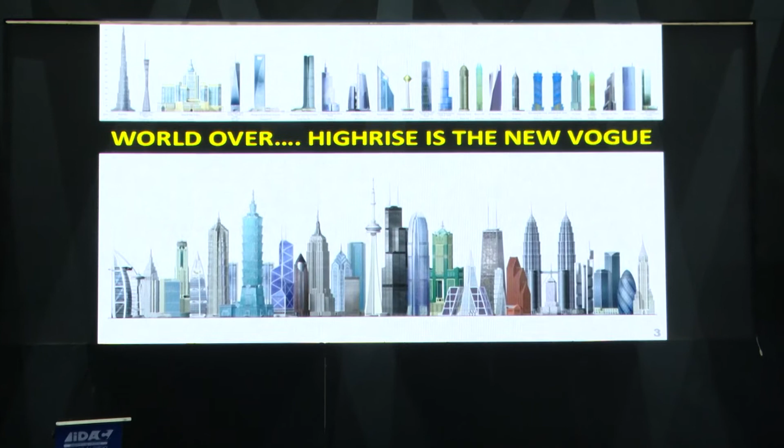Most of the time, in the extreme, you see the good high-rise buildings are done by architects and engineers together. It was an architect and engineer who did the first high-rise building, an icon in the USA. It's an architect and engineer who brought you the concept of structural designing for the last century, for the next 100 years. So the architect has to play the role of an engineer and understand engineering, and the engineer should also understand architecture. In this context, I want to speak to you about that. Today, of course, I will be talking about high-rise buildings in India particularly.

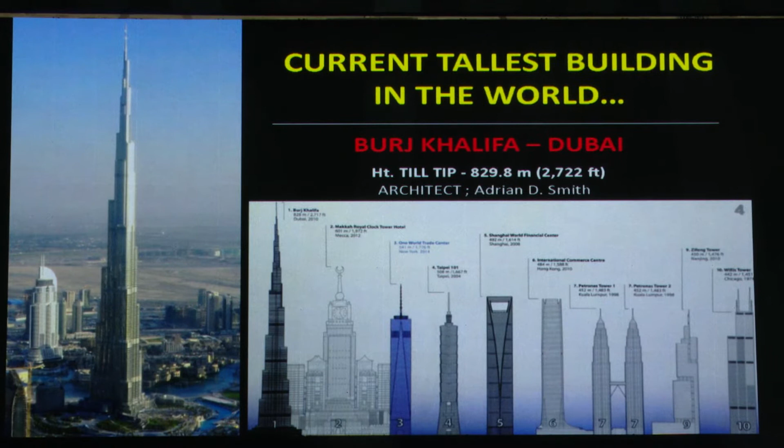The current tallest building, as everyone knows, is the Burj Khalifa, and the next one coming is the Kingdom Tower. It will be about 1,000 meters. Really, next year, possibly.

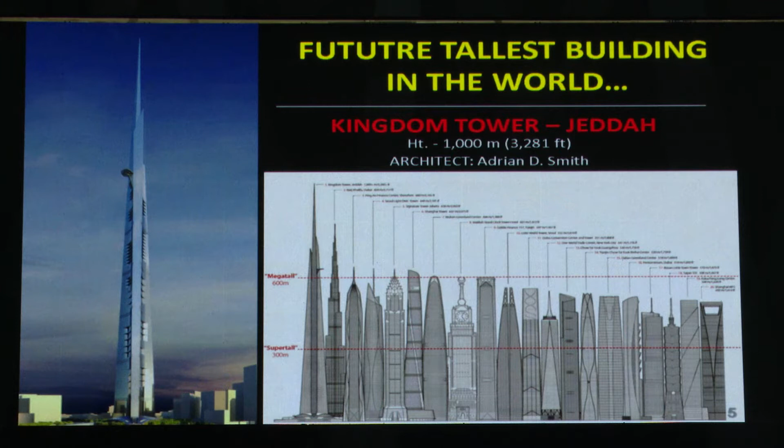It was 1950, 70 years back, when architect Frank Lloyd Wright had devised a 1 mile building, 1609 meters high. Yet after 70 years, the building when it's ready will be 1 kilometer, 1,000 meters, not 1 mile. 1 mile is yet to be reached, that is obvious. Somebody will do it.

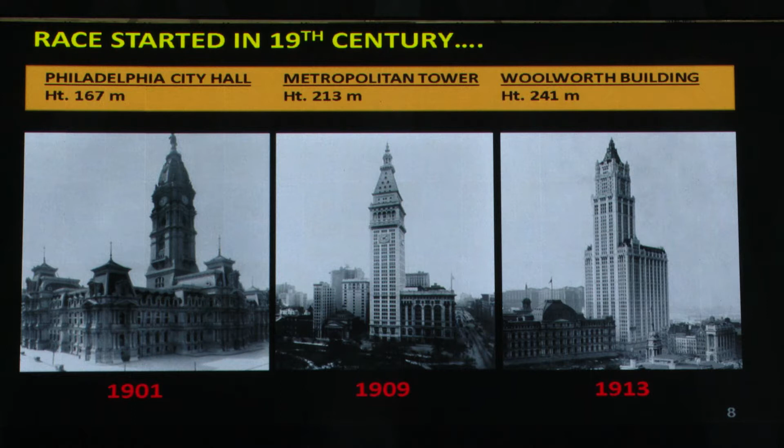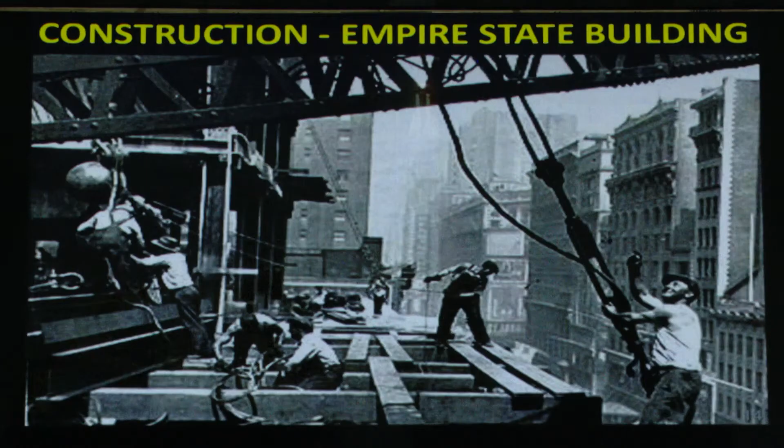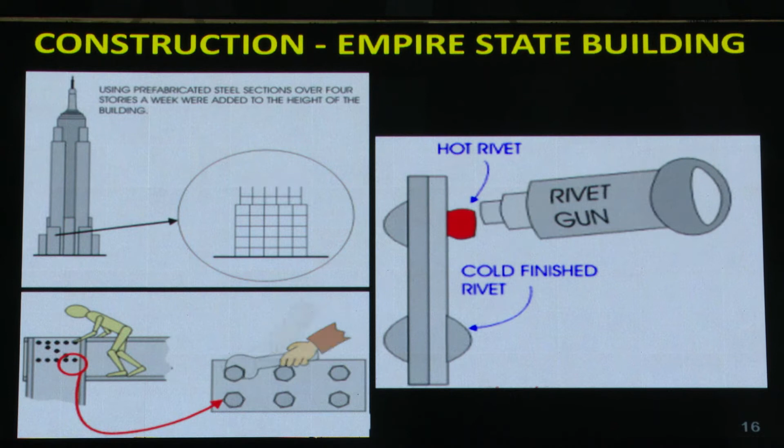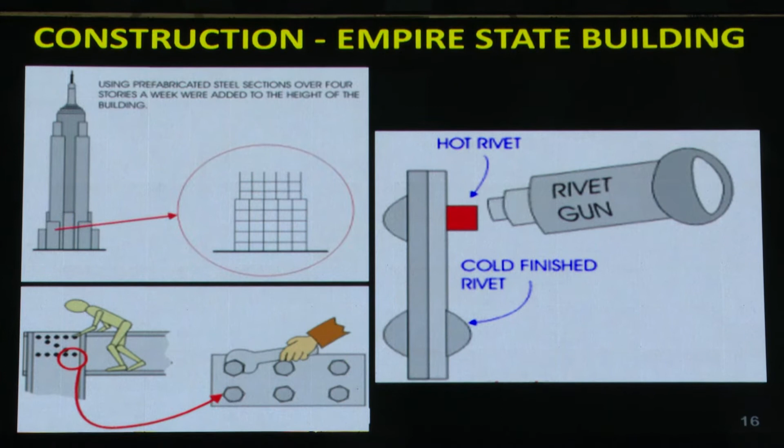What kind of pre-engineering had been done? I'm talking 90 years back, and the building is still standing there.

Look at the boy putting a spire on the building, the Chrysler Building is next to that. Having made this iconic building, do you remember who the architect was, or the structural engineer? What difference does it make? Who designed the building - did Prem Nath design it, did Anna design it, or who designed the building? So never mind, you'll be forgotten one day. Be happy and do a good job for the sake of your knowledge. An iconic building, less than 100 years old, and nobody knows about the architect and engineer. The architect was lost, and the engineer was forgotten too.

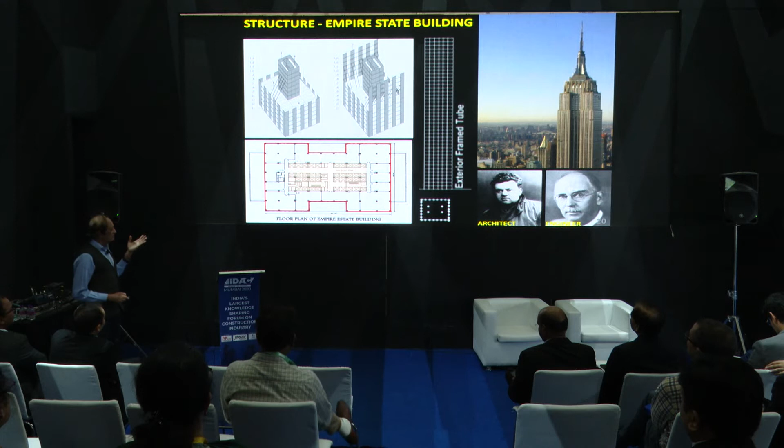And what did the engineer think about that? You didn't have computers, you didn't have a system, you didn't have E-tabs, B-tabs, whatever it is. You didn't even have a calculator - the slide rule was used over there. How must they have designed the building? Think of that.

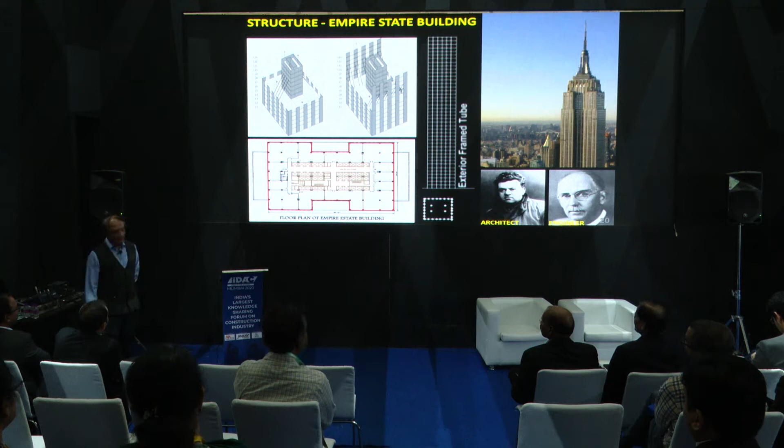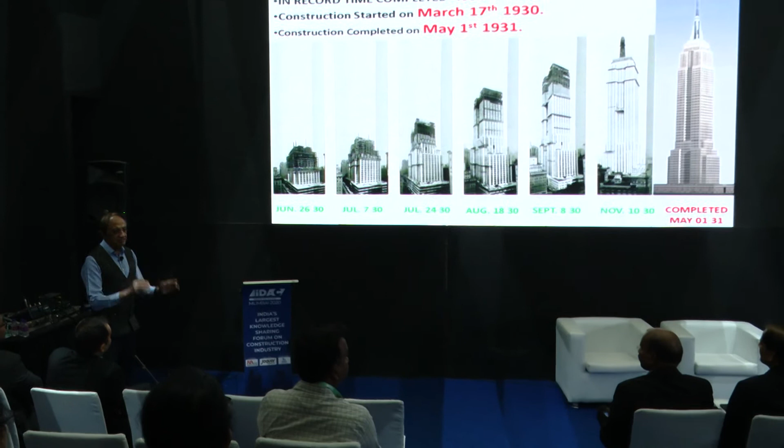The entire structural designing was done while excavation was being done - the plan was being developed at that time. How much time do you take today? You go to engineers, do analysis, do this thing, do that thing - it takes 6 months, 3 months. In 3 months time they would come out of the 10th floor. 104 foundations, 20 meters down, 4 floors, and they had come out of it.

What is our old mystery? Our old people were smart enough - they had one kind of thought, the job is done. They could think fast; today it takes so much time. Implementation takes time, but the design and building was about 12 months time. Can anybody beat that today?

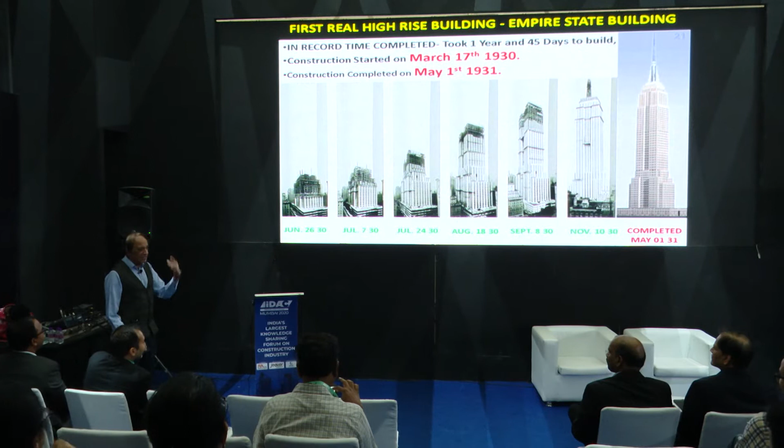We hear China has been doing this - they take about 6 months time for pre-engineering and then come and assemble in 2 months time. That's not a great thing compared to this.

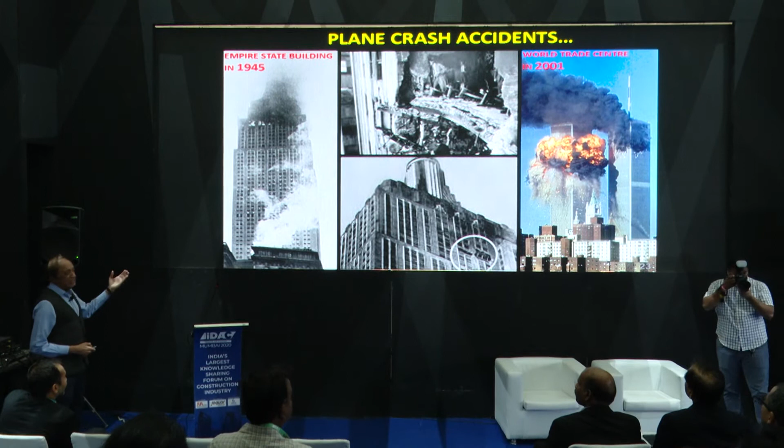This building has been recently renovated, and this building is a test of time. It has gone through earthquakes, windstorms, and a plane crash also. The twin towers fell down, but this building didn't fall - there was a similar kind of accident, a crash, a plane crashed into it, but it survived. A lot of stiffness was built into it.

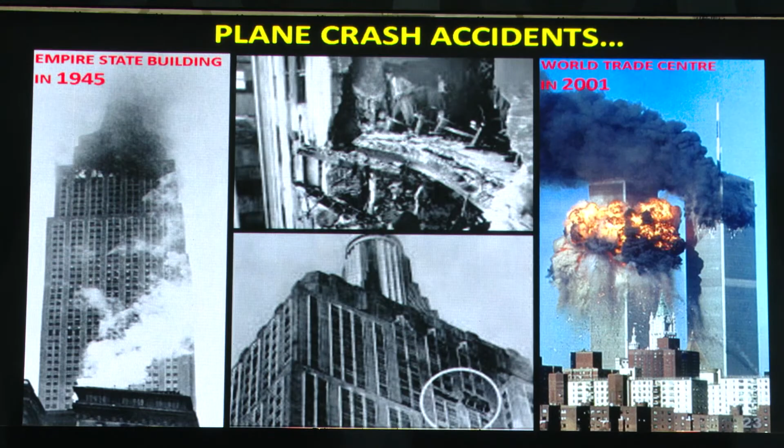The structural system - what you call it - is a core with a tube around it. That's why the building was designed to give stiffness to it. This building has now been renovated and carries a gold rating green building certification - the first time such a building is done after 100 years.

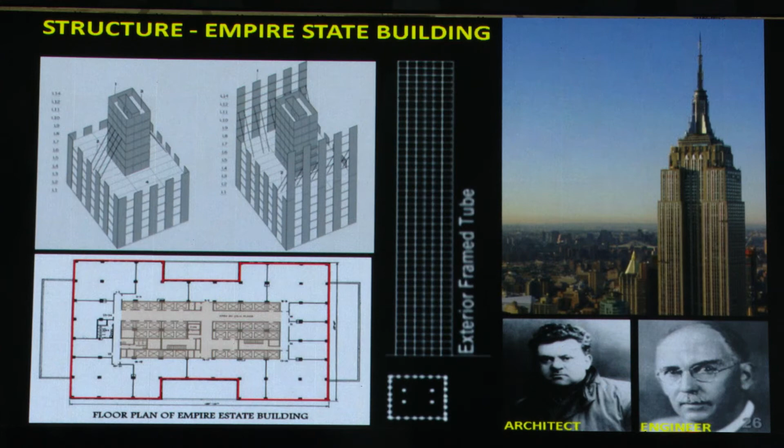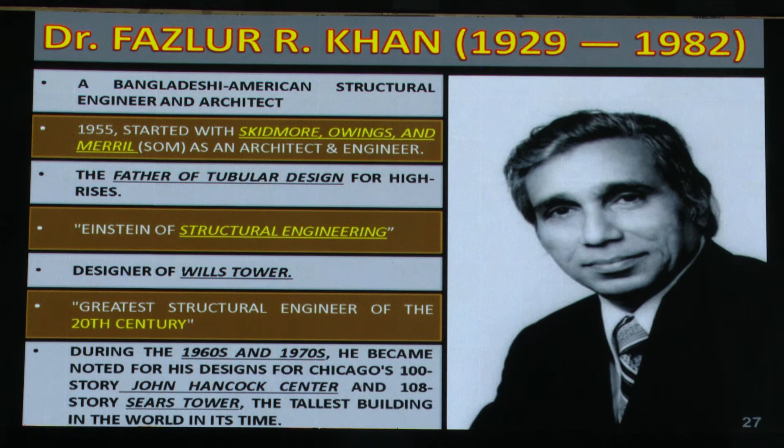The structural system was basically an exterior framed tube, done by them about 100 years back. And after that, you know the guy, Dr. Fazlur Rahman Khan? He's the Einstein of structural engineering. He gave the concept of structural engineering - various working schemes, various design concepts. He built magnificent buildings and gave concepts about different types of structures at different heights. These are being followed by engineers worldwide till now.

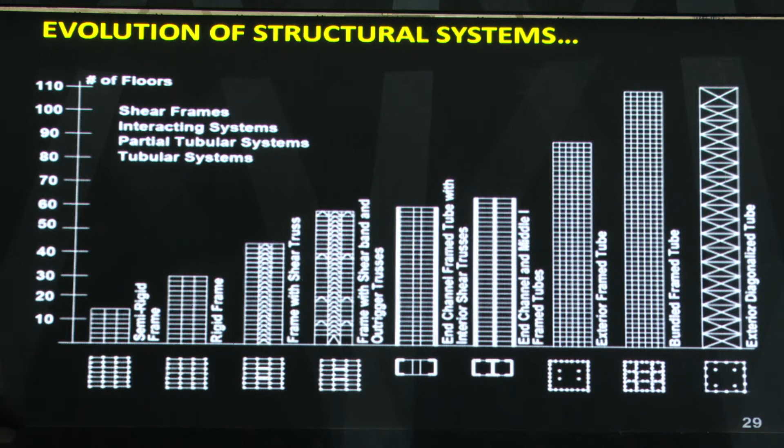What do you call that? You call this double tube. You have a bundled tube. You call it tube in tube, and different things. Even Burj Khalifa and our building in Mumbai use the same concept called tube in tube. They were planned by the architect keeping in mind what the structure could survive.

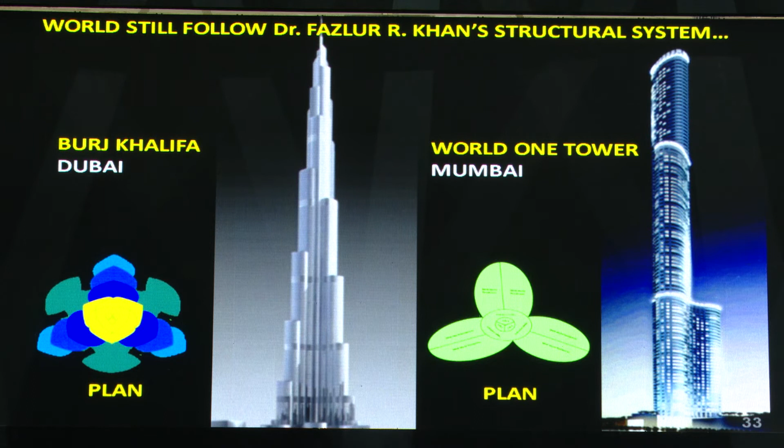You can do acrobatics, understandably - you can do a great job there, but at enormous cost. Once in a while it happens, but not always. So the architect has to understand structure, so that the job will be easy. My engineer - I give him a system every time, because I give him system. I know what is going to help him, so give me the best technology design.

We all know that we have wind speed pressure, and people use various methods like wind tunnel testing. Today, it's done with computers.

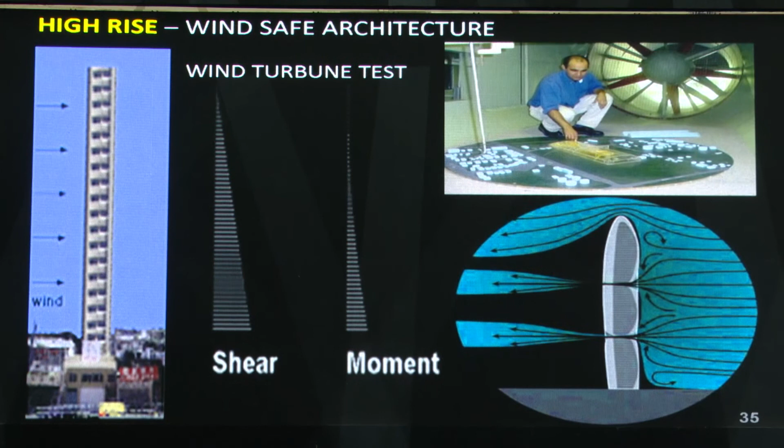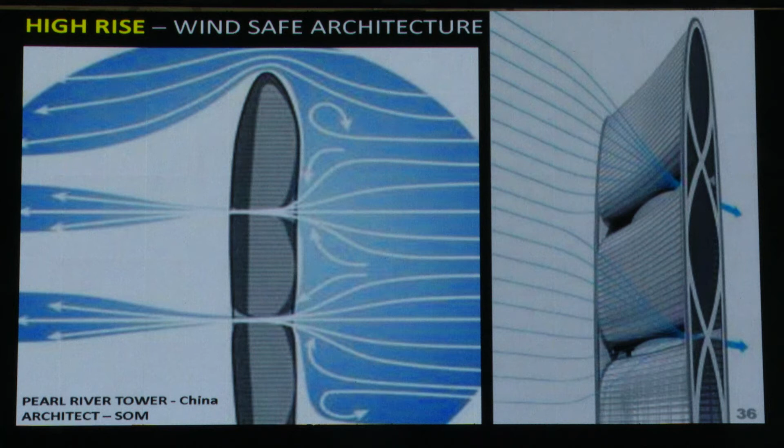In China, one case was done beautifully. They gave a cavity about 3 floors at 2 levels and let the wind pass through, putting a turbine there so they can get wind power. The advantage is that wind pressure is released and produces energy for the building. That's very smart architecture, and engineers help us do it. This is the kind of building you see here.

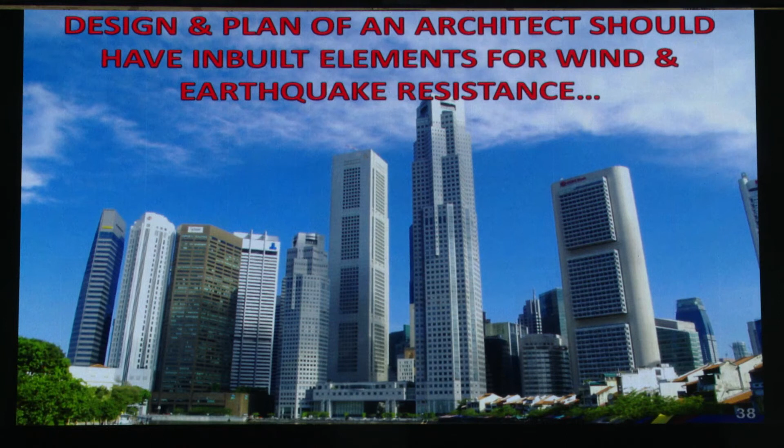In an architect's plan, it helps you have inbuilt safety about earthquakes. If the plan is very funny, God forbid, you may have to put a lot of steel and still struggle. But if the architect is smart, it will give you inbuilt safety. Understand what form goes well there.

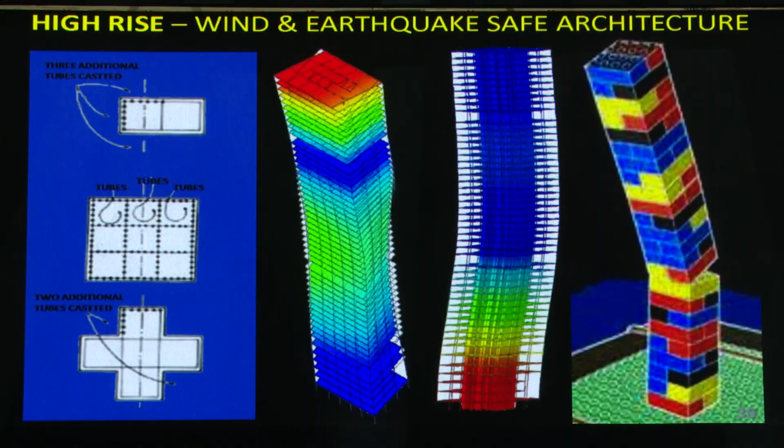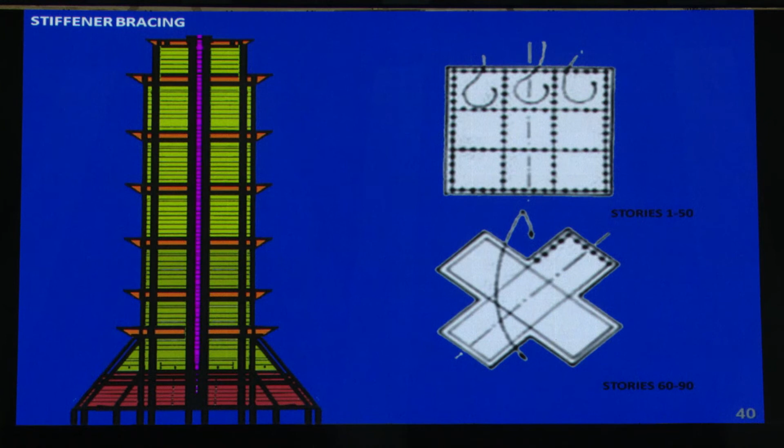And then you give braces, the load gets distributed in a larger area, and that helps you distribute load plus earthquake safety also. This is kind of our sketch in my building design.

Another thing there, most engineers are not using it - structural engineers use it - you can call it a stack system. Somebody gives a small atrium or a hole in the building.

You know, like a chimney - mills have chimneys, they stack, the smoke comes out. Stacks are the safest structure in a building. They've never fallen - anywhere in the world, buildings have fallen down, but stacks remain standing, because of inbuilt safety in that.

But what happens against wind pressure, the stacks give you a kind of moving, swirling pressure. It goes physically up in a swirling kind of pressure, which helps you against the wind pressure. The internal wind pressure builds up, giving stability to the building. The building doesn't move, it becomes stronger, and it helps you cut down against the forces.

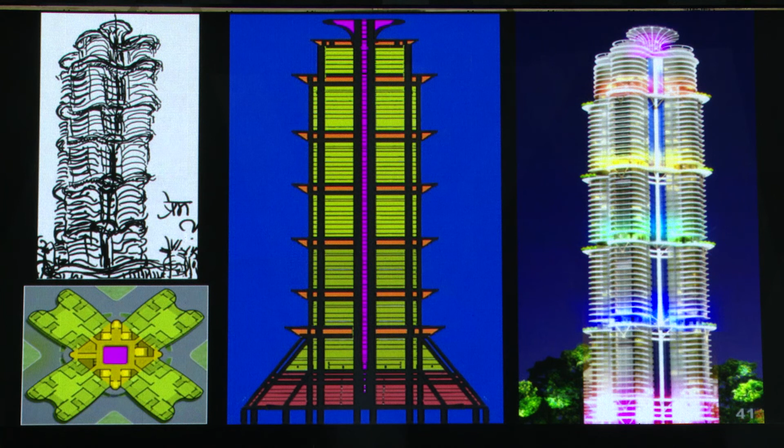This is a building coming up here, Palais Royale. The atrium here is about almost 80-90 floors. This building can go 100 floors more with a similar stability structure system. No wind pressure will affect that.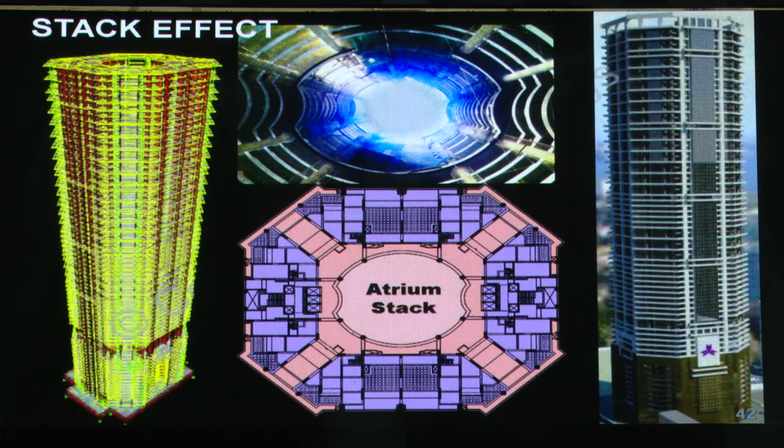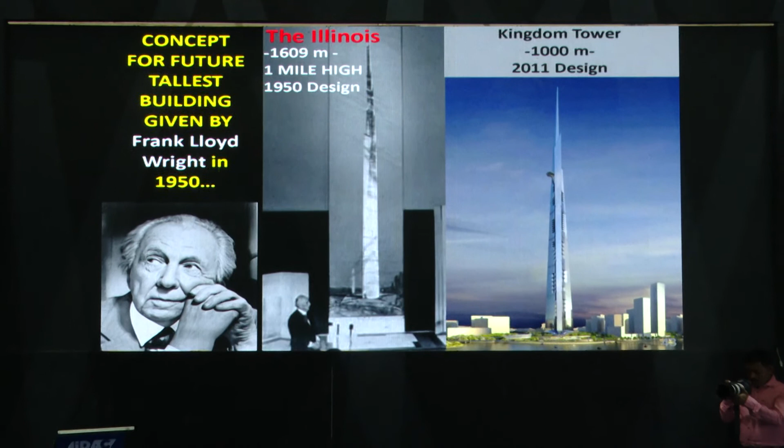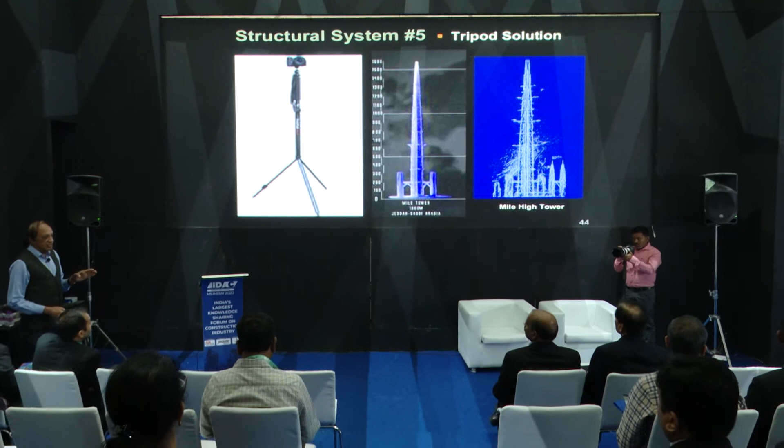I repeat again, Frank Lloyd Wright built a building, gave a concept of a tall building, a 1 mile building. He also gave the structural concept at that time - you know how a tripod works? In his building design, he gave a tripod system for the structural system.

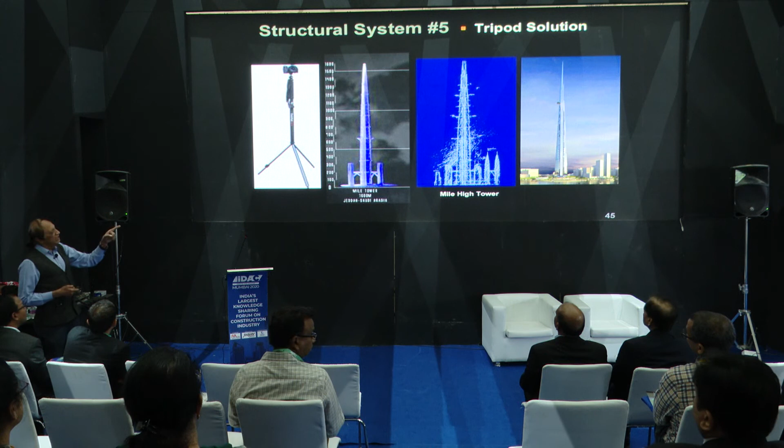And on the basis of that same tripod system, your Kingdom Tower will be built now. What he gave as a concept about 70 years back, on the same basis, the Kingdom Tower has been done now.

In India now, we are going to have opportunities for high-rise buildings. The Bombay Port Trust is doing about 305 acres of land development. We will also have marinas and cruises, and a new waterfront. Look forward to possibly a new skyline coming here - a great opportunity for architects and builder developers to have a new line here.

I'm sure with this, new landmarks will be coming, and I'm sure some of you aspire to design some landmarks here. Possibly you will see again great buildings, and I hope I'll be around to design and build some buildings.